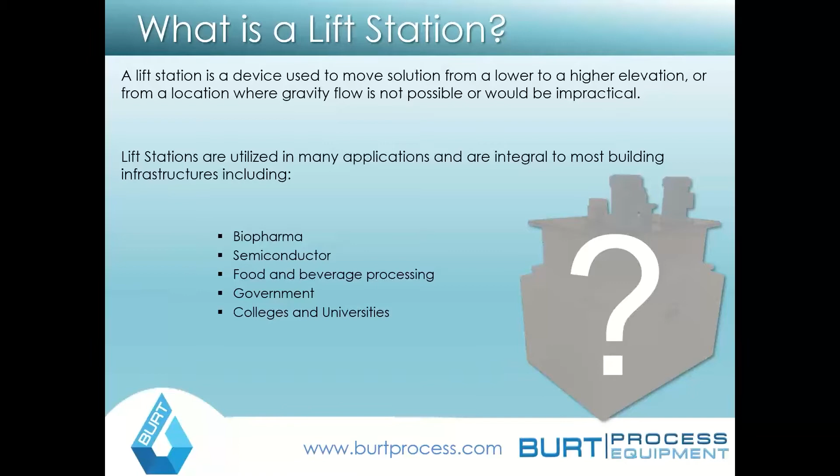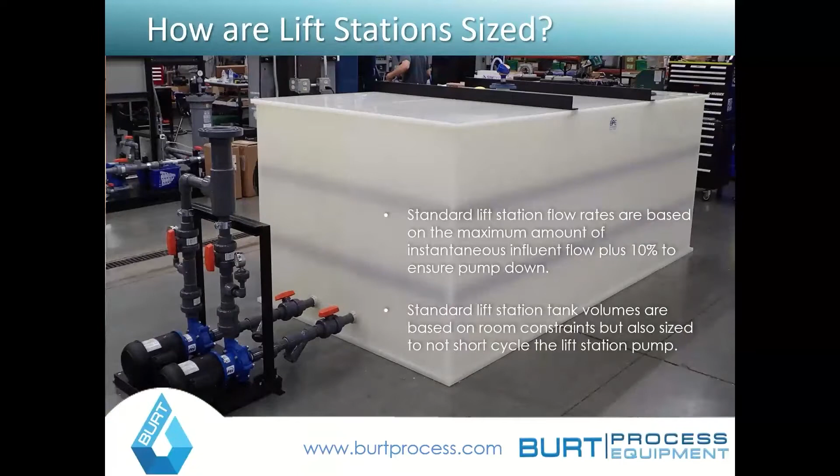So if you're looking at sizing these, you really do not apply much in the way of a diversity factor to a lift station. You want to utilize it in such a way that you can always pump down, because the risk of not being able to handle sufficient flow is backing up your pumping system. And you always want to be a little bit higher than that, since a lift station is designed to cycle and allow you to pump down the unit.

As far as standard lift station volumes are concerned, generally all you're really trying to shoot for is that you size the lift station so you don't short cycle your pumps. Now, depending on what kind of pump that is, whether it's a centrifugal pump or a sump style pump, those requirements will vary.

But by and large, 3 to 5 minutes of residence time is a good rule of thumb when coming up with a lift station design for standard sizing. So as an example, if you were going to have a 30 GPM lift station, you'd want somewhere between a 90 and 150 gallon tank approximately. It's a good rule of thumb.

Now, obviously, practical considerations have to come into play with this, and very often this is getting a little bit away from the standard design. If you're looking at things more like equalization tanks or devices like that, you would obviously want to upsize that and have some additional residency time. But if you're simply just trying to pump the waste, as basically a standard design, 3 to 5 minutes is a good rule of thumb for sizing one of these systems.

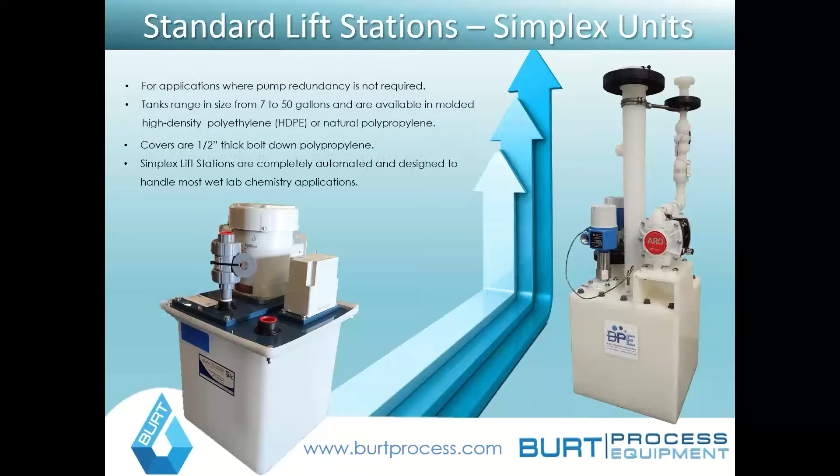Lift stations generally come in two primary configurations: simplex and duplex. There are rare cases where you will see more than duplex pump configurations, but by and large, simplex and duplex lift stations tend to be the most common. Simplex probably not so much. In a simplex lift station, as it implies, you have a single pump as part of your lift tank design.

And these tend to be smaller units. The real reason to use a simplex lift station is really cost and footprint driven. Once you need to add a second pump into these systems, the system needs to get much larger. And some of these are designed to go under even a single lab sink, for example, as you can see here in the picture on the left, where this will literally just slide under a sink and allow it to be pumped out from there. So they're very good from a room standpoint.

They can be very economical, but they do have some downside. You only have a single pump, so you don't have any kind of redundancy. So these are best utilized in applications where either, A, you're forced to because of a room allotment, or two, it's not a critical process, or it doesn't really matter if the system has to come down for some amount of time in the application.

And these can range from very simple ones like you see here on the left to much more complicated designs, say for a semiconductor tool like you see here on the right, where this is more of a PVDF based material. As a standard design, you can see these can be very small. This particular unit here is a foot by a foot by a foot for the tank, and then you just have a basic pump design, and a simple on-off float-based level control for these units.

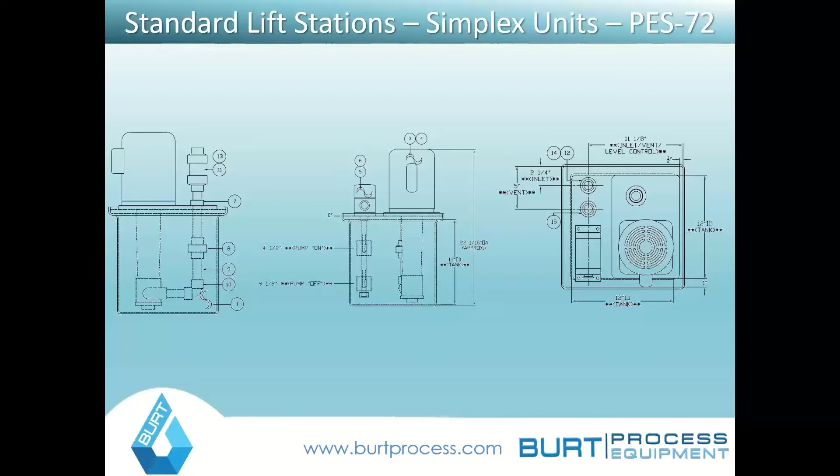As I mentioned before, standard simplex lift stations are often utilized under a sink or a single process source. They're not a good choice when you're dealing with critical process applications, or where you're going to have to pump down an entire floor or an entire process suite. These can, though, have some different options added into them for that protection or lack of redundancy.

They often have alarm features added for high-level alarm, and they can also have leak detection as well, just in the off chance that you do have a pump fault failure and no one realizes it based on the basic controls that come standard. So there are a number of different options available for these types of systems.

Duplex lift stations, I would say, are probably more common, because introducing any kind of pump into your drainage line introduces a point of failure. Having a duplex lift station gives you that assurance that you have backup and redundancy in the system. And you can see here a couple of different examples. As a standard, duplex lift stations are set up for alternating pump control, whereby each time a pump kicks on, you'll alternate between the two pumps to allow for even wear across both units.

You generally also set them up in a lead lag configuration. What that means is you have a 4-point control in a lift station, where you have a pump off point as your lowest point, and then as the water level begins to rise in your tank, you have a lead pump on. Then as the water level continues to rise, which it shouldn't unless you have additional drainage coming in or a pump failure in the lead pump, your lag pump will turn on, and then finally you'll have your high level alarm. They generally are set up so you can have both pumps in operation.

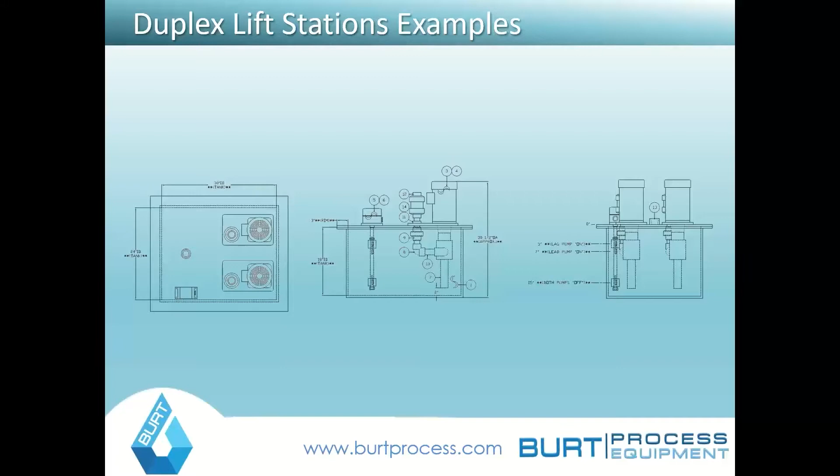But by and large, duplex lift stations do tend to be a more common choice, especially when you have critical process redundancy, and really when you just cannot afford to have shutdown. Whether you're treating the entire floor, or you're feeding an entire facility's worth of waste coming to the system, then you really do need that duplex capacity and that redundancy based in your system.

Burt Process Equipment has a number of standard lift station designs which are available, and you can kind of see here a part builder that we utilize, and we can work with various clients and engineers on. And these range from fairly small lift stations around 7 gallons, that's the image of the drawing I showed earlier in the presentation, up to a standard size of 260 gallons, with flow rates ranging from a couple of GPM out to about 80 gallons a minute for these units.

And these are handy in a very wide variety of applications, as they're a standard configuration, and they do scale for a lot of different laboratory applications, indoor process or industrial applications. But these are obviously just the beginning. And what we're going to move to going forward here is talking a little bit more about how custom lift stations are designed and what their applications are.

And I just want a couple of notes on this. You can really run these at a lot of different voltages as well. That's a question I do often get with lift stations in general, but also with standard lift station designs. Almost any lift station can run either single phase, 115, 230 volt, or three phase 230, and then 460 volts. Some of them just make more sense to run in a different configuration, and some of the smaller lift stations can actually be plugged into a wall outlet.

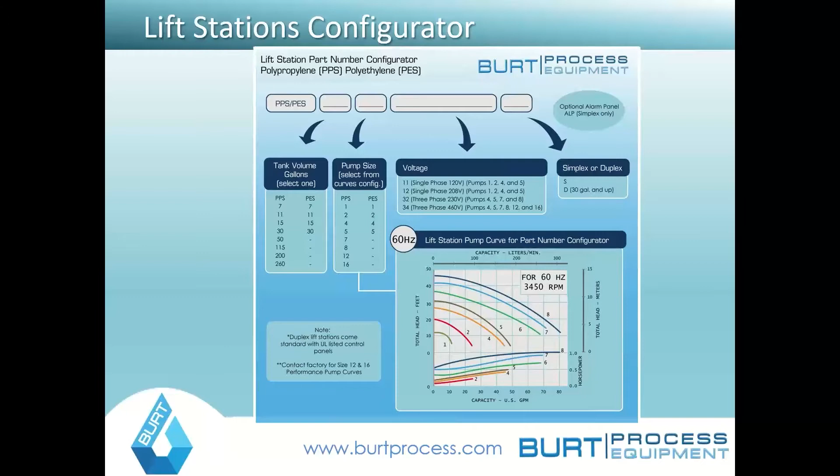And this is a blown up image here. You can see the part number breakdown. A majority of these lift stations are thermoplastic or stainless steel. The standard ones are polypropylene or polyethylene. There are other options available as well beyond just stainless steel. In these two base units, Hastelloy is an option for certain unique applications, coated stainless steel, and also PVDF as well, depending on the nature of the chemicals that could be coming into the process equipment.

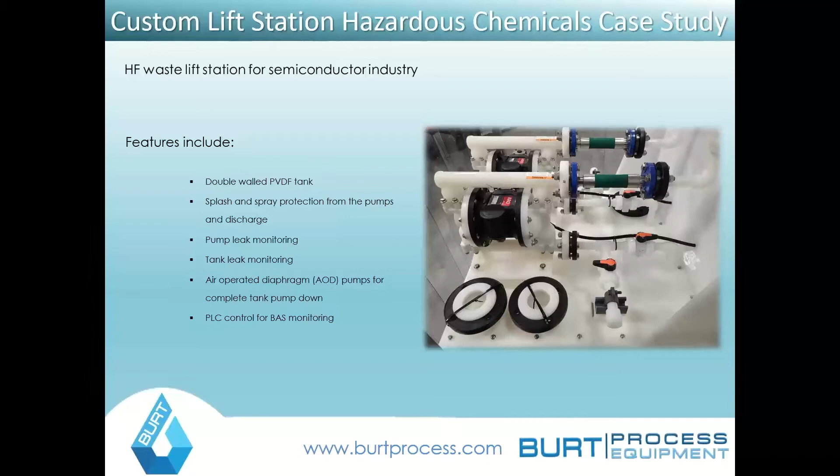And we start talking a little more about solvent-based lift stations. It also gives you the ability to prevent any kind of fume readings from any of the solvents, gases from getting out of the cabinets. So it allows you to have a better area classification from an electrical standpoint rather than going Class 1 Div 2 or Class 1 Div 1 in those cases, because you are containing the actual fumes that could be coming off of the lift stations from the waste that you're actually dumping.

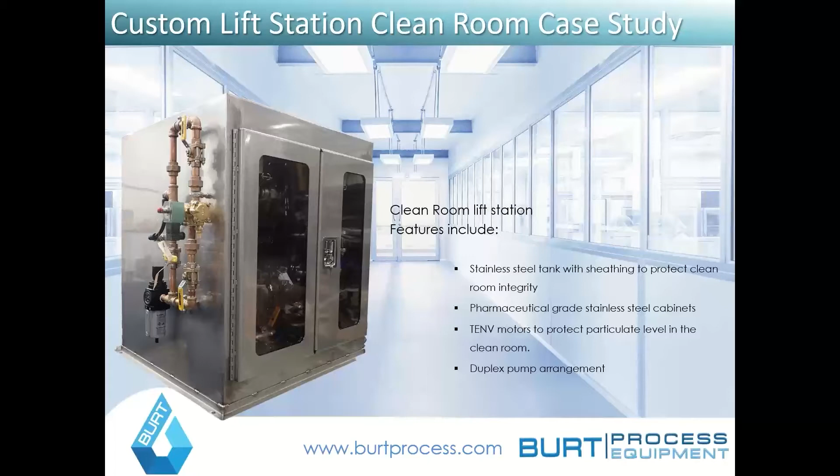A lot of times, if you're dumping sterilizers or clean steam or blow down into more of an industrial lift station, you do have to look at making it more temperature resistant in those cases. Basic standard lift stations can operate generally at 140 for polyethylene, 185 for polypropylene, and then if you're going to go into 200 to 220, you're going to be fiberglass or stainless steel lift stations. So material consideration also comes into play based on the nature of the waste that you're putting into the system.

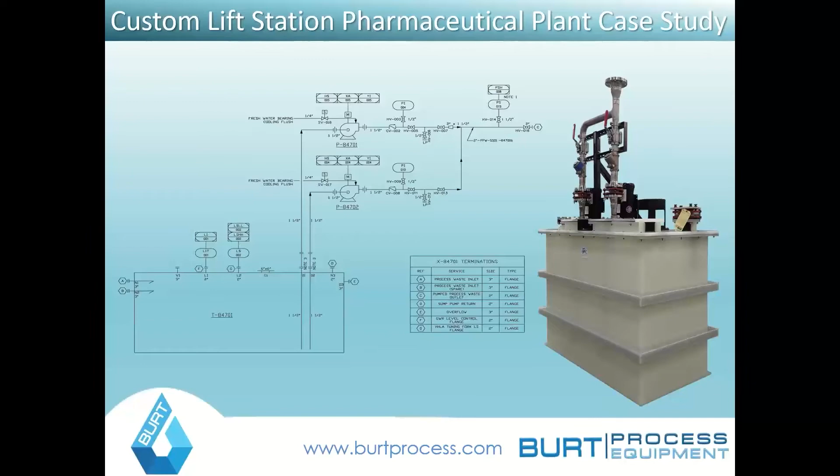As I mentioned earlier, lift station pumps are not always even integral to the tank that they're actually drawing off from. In this case, they have more of a pump skid design where you're going to be drawing off of the tank with more of a magnetic drive style pump. And again, this really depends on the application. Sometimes it's more practical to have just a side mounted pump design, depending upon room access, if the tank's strictly tall, if it's actually more of an equalization tank.

Here in this case, they have a polypropylene double wall tank, and they have ultrasonic level, really because this was a very tight footprint design from an overhead standpoint. You didn't want to have a lot of pumps sticking out of the top of the stations. They have more of a pump skid design. This can also be the reverse, whereby you can use a self priming version of a pump like this and then draw out of a tank in the pits where you'd have a separate pump skid design as well. So this is just one of the options available where you'd separate the pumps from the actual tank and make it more of a skid-based transfer system.

And then not all lift stations deal with waste. Very commonly, as we've kind of talked about, a lot of the lift stations that are utilized will be taking waste from a tool or a process or blow down. But sometimes you'll also use a modification of a lift station to actually feed a chemical into a system, almost like a large chemical transfer system. And that's actually what this is in this case. This is a cGMP system for transferring glycol into the production area.

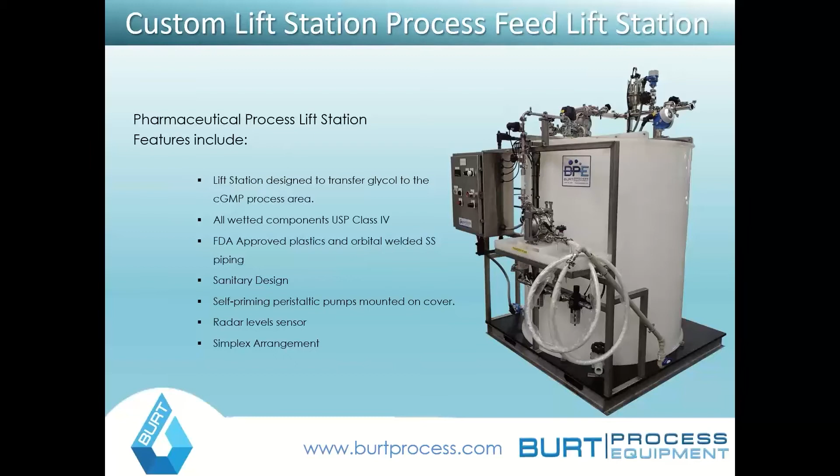So if you have waste that needs to go to an EDS or a biokill based system, where you're going to be doing thermal kill, or you want to be able to steam sanitize your lift station or part of your drainage system, a lot of people will use more of a sanitary pumping design for those types of waste lift stations as well. So sanitary, while maybe it seems counterintuitive, is oftentimes utilized in process waste lift stations as well, because it gives you the ability to do steam cleaning where you may have a biological waste that you're ultimately pumping and transferring from your system.

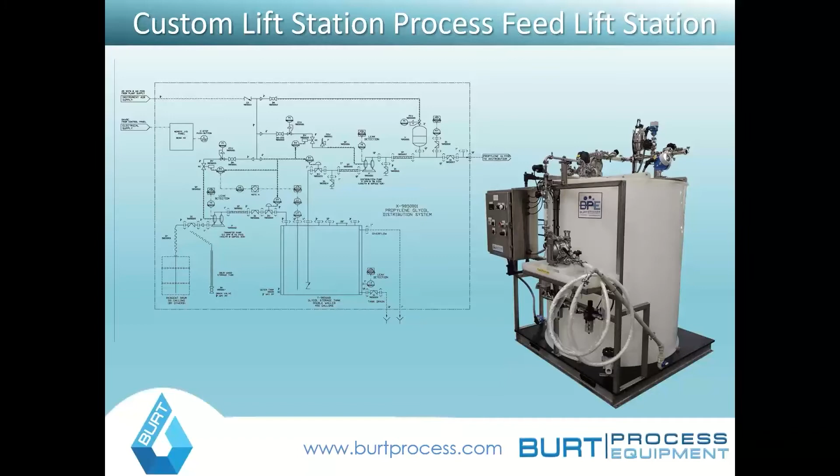Before we get into a little bit more about solvent and hazardous stations, I think we're going to do our second poll question at this time. So if anybody would like to review, feel free to answer, and we'll discuss this.

All right. So the question is, when designing a lift station, what diversity factors are applied? In this case, when talking about process based, we are saying we are applying no diversity factor. We are assuming it's going to be the full flow rate that would be handled by the actual system. There are different circumstances where you would look at different diversities, but it does depend on the application. But by and large, for most transfer-based systems, the pump is sized for the actual flow coming into the unit plus 10%.

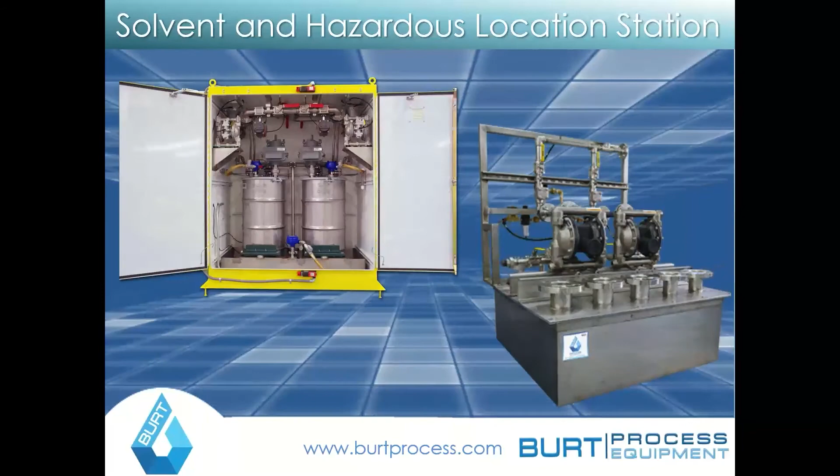You can also have very specialty control panels with these types of systems. So this is a big thing to consider. Should you go down that route, understanding the area classification is very critical for designing lift stations for that type of application.

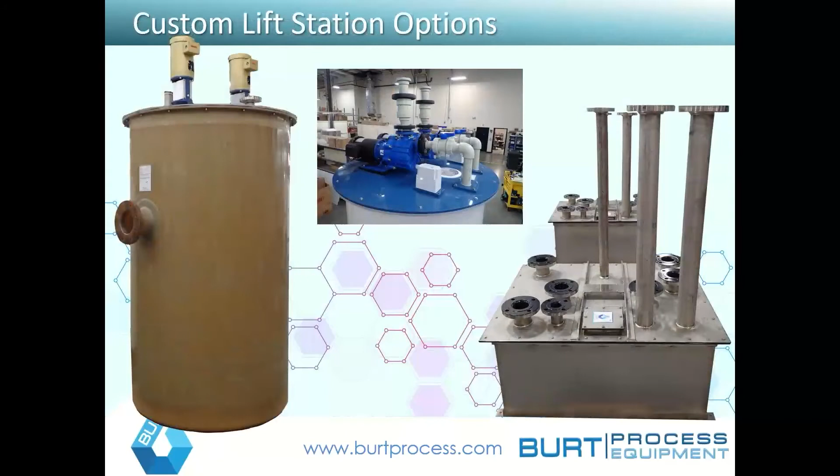Beyond just solvent, there's a number of other, more custom options that come into play with these types of systems. The example here on the right, these are all PTFE coated lift stations, and this comes up a lot when you have very strong chemistries involved. In this particular example, these were tanks in a pit, and those are the suction pipes that are all coated as well that come up to a pump-based skid.

In place of making a Halar or Teflon lined tank, or a Teflon tank, which isn't very practical above a very small size, coating of the tanks is a very viable option for very strong chemicals that could be utilized in the plant. So that's definitely an option which can be utilized. Again, it's very chemical dependent whether you'd want to do that or not.

Looking at the example here on the left, this is a fiberglass based tank. Fiberglass is a fairly common material when it comes to lift stations. One of the reasons is because it can have a higher temperature resistance sometimes, but it can also be buried. One of the things that comes up sometimes is, if you have a lift station, can you put it in a vault, or can you direct bury it?

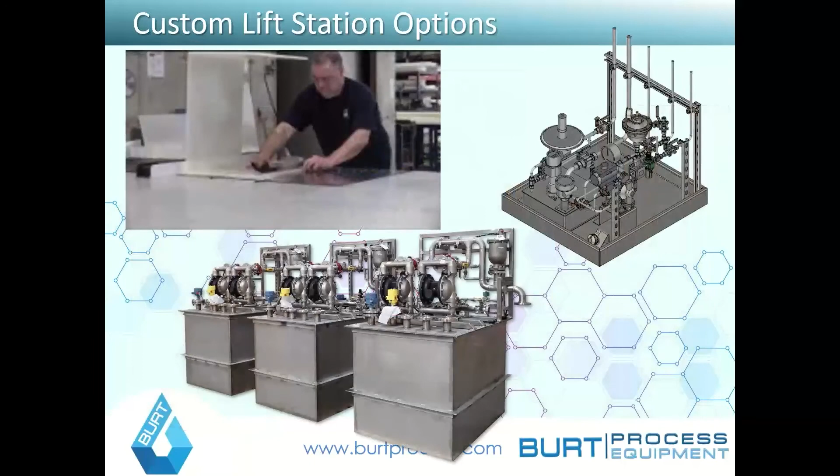Just showing a very brief video here, this is some of the different ways that some of these more custom lift stations are made. And just because they're custom does not necessarily imply that there's a lot of cost involved. I mean, it certainly can be the case.

But there's a lot of options when you're making these, from building different tank designs to different tank geometries. You can really make them very specific to the application because you are making them largely as needed, in the custom arena, more from scratch. So in this example here, they're just showing how the tanks are bent to match a particular geometry, in this case a square or rectangular tank design for these units.

And then, looking at some of the images here, these are more of a pharmaceutical grade stainless steel tank. You can see here, duplex design, designed for high temperature waste coming out of a CIP based suite. In this case here, all welded construction for leak protection, pulsation dampeners. This is the kind of thing you would very typically see in more of a pharmaceutical or very heavily industrial plant. And then looking up here in the upper right, this is actually an all Hastelloy lift station.

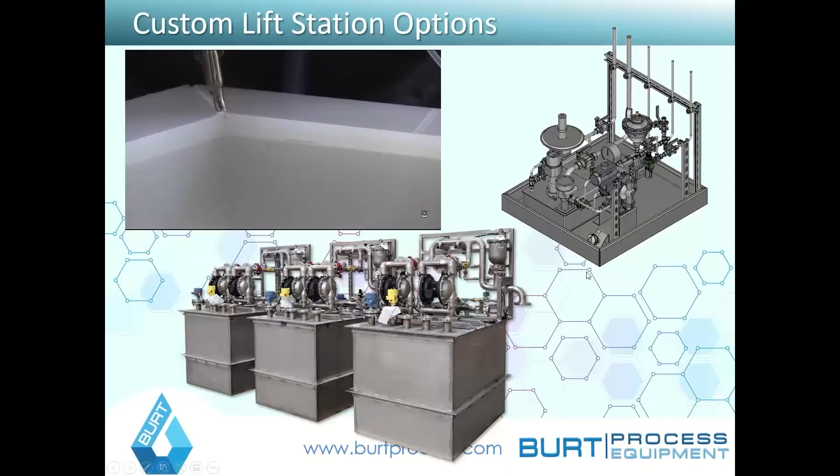And again, designed for very particular chemicals which are involved. These have a number of different features. They have argon regulators in them. They can have nitrogen purging in them. And these are some of the different options that really can come into play, depending on the nature of the waste or what you're actually trying to transfer. These can get extremely custom in those cases.

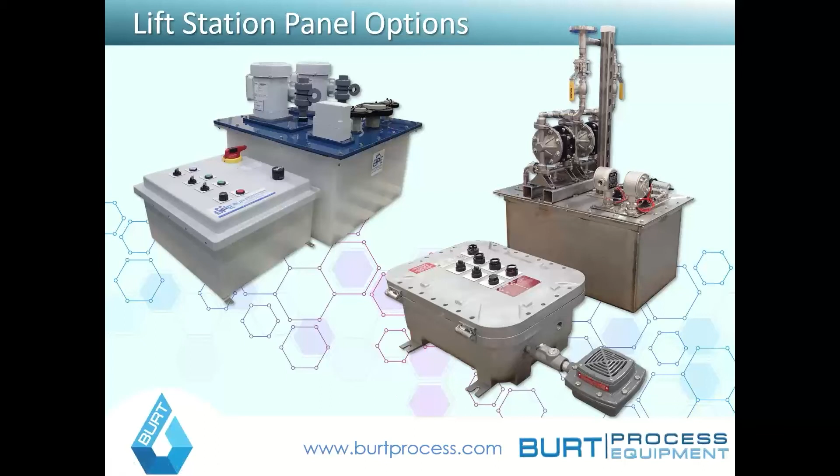And then, controls. I've talked a little bit about control panels for lift stations. And for a lot of standard units, lift station controls can be very straightforward. You can have a simple pump on, pump off control. Duplex, you can have more of a 4-point configuration. Looking at the example here in the upper left-hand corner, that's a fairly standard duplex panel. You have pump HOA switches, you have a pump lead lag alternator controller, and then you have a few disconnects and motor starters for these.

From there, these can really scale. Like an example here, the explosion proof lift station unit. This is all NEMA 7 at this point. Same basic operation, but again, when you're talking about hazardous-based design, it can be very important if you either need to use a NEMA 7 panel such as this, or you need to use a purge-based control system as well. That's why it's important to understand how exactly you want to set up the controls for these systems.

And then from there, they can really scale. In some of the examples we talked about today, there are PLC-based controls for these units. They're going to integrate them into more of a master-based system, whether or not they wanted the readouts. So really, the controls for these systems can go from very simple up to explosion proof, up to much more complicated, like PLC-based controls, for these applications.